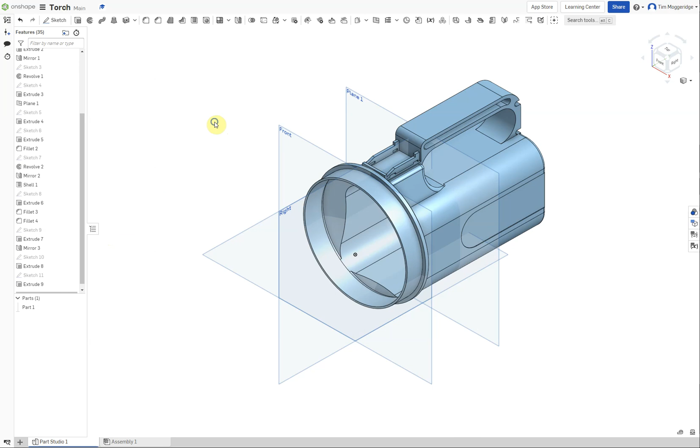In this video we're going to carry on working on our Onshape torch body model, and we're going to add on the features that would allow the switch to be mounted to the torch body. So the first thing we're going to do is, using the right mouse button, just spin our model around once we've loaded it in, and we're just going to right click on this surface and select new sketch, and then we'll press N to view onto the work plane.

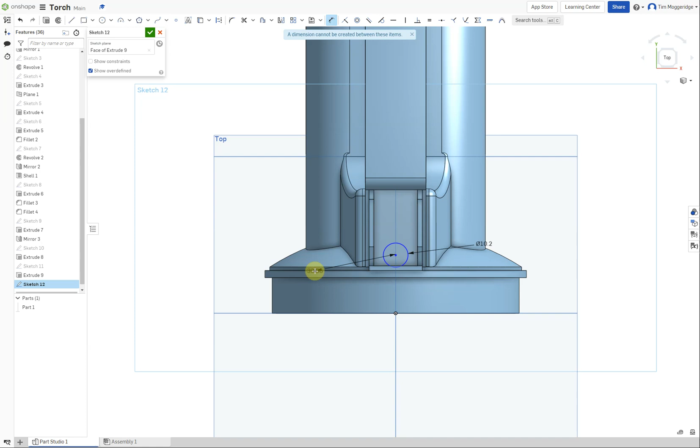I'm now going to use the center circle tool, and I'm just going to draw a circle that lines up with the origin and the edge of the right work plane. Click in the middle to start it, and then click again to create the circle. And I'm simply just going to put 2 dimensions on here. I'm going to dimension the diameter of the circle, which is going to be 10.2 millimeters, and I'm going to dimension from this edge here to the center of the circle, and that is 18 millimeters.

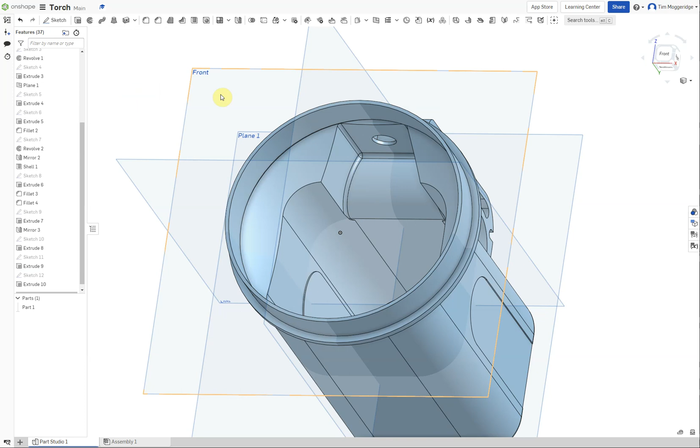And I'm just going to move that round slightly and come inside so that we can see it, and we're simply just going to extrude remove to create a hole. So click on the extrude feature, select remove, and we can just simply change the condition up to next, and it will just put a small hole through those 2 surfaces. And that's the first part done.

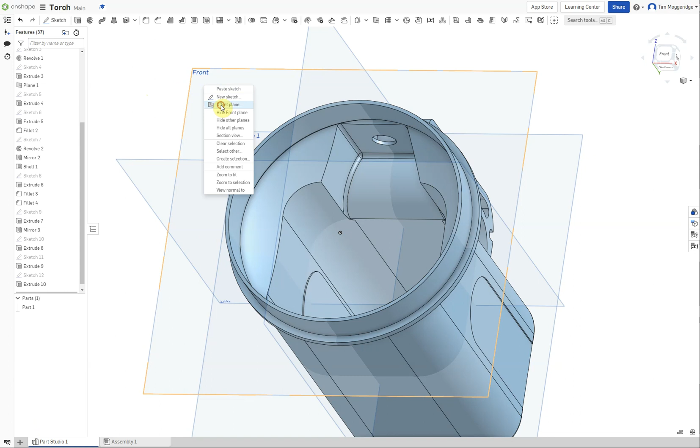We're now going to add in a pair of lugs that would also locate the switch. And to do that, we're actually going to create a new work plane. So at the moment we can see the front work plane. I'm going to right click on the front work plane, and I'm going to left click on offset plane. Now if I spin that around, you can see at the moment we've got a plane 2 coming in front of that. I actually want it to go behind by 36 millimeters.

So I'm going to flip the direction, and you can see that plane 2 has gone behind, and I'm going to change the distance to 36 and click enter. Now you see it's called plane 2, and down here it's called plane 2, but so I know what that is, I'm going to rename it. So click the tick to say I'm happy with it, and then I'm going to right click on plane 2 and rename it, and I'm going to call this switch lug plane, so I know exactly what it's going to do.

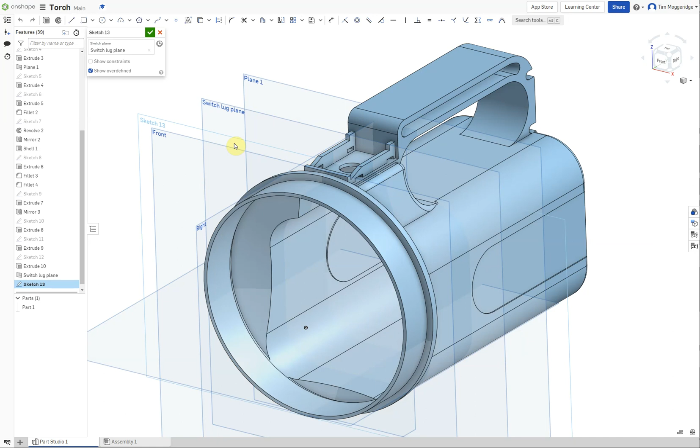So I'm now going to create a new sketch on the switch lug plane. So I'm going to right click on the switch lug plane, select new sketch, and then press N to go normal to that. And we're looking down into the torch now. I'm simply going to select the corner rectangle tool, and anywhere over here, I'm just going to drag out a corner rectangle, and then I'm going to dimension it. So I'm going to dimension the far side to the center line, 13 millimeters.

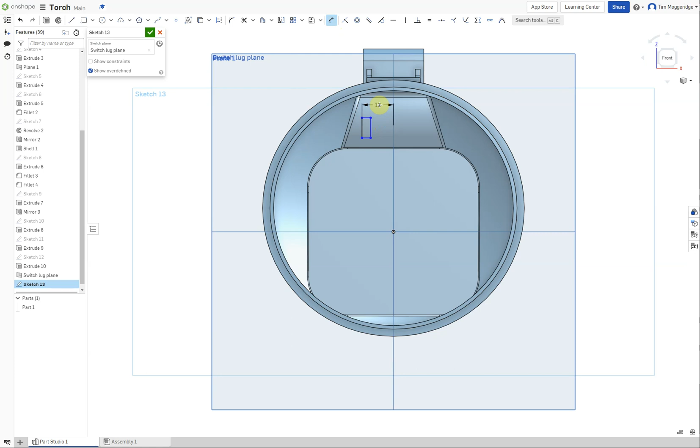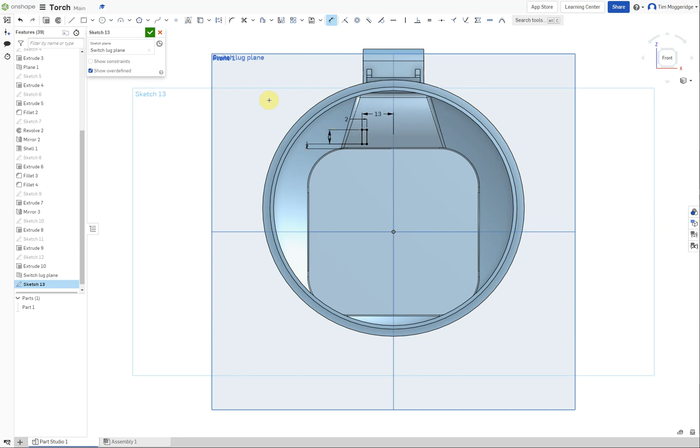I am going to dimension from the very bottom edge here to the bottom line of the rectangle. I'm going to change that to 2 millimeters, and I'm going to make the rectangle 6 millimeters high and 2 millimeters wide. Once I've done that, I'm just going to move that sideways, and I'm now going to extrude that up to the surface in here. So I'm going to use the extrusion tool, and I'm going to change the direction so that it goes into the torch, and where it says blind, I'm going to select up to next, so you can see it's gone in.

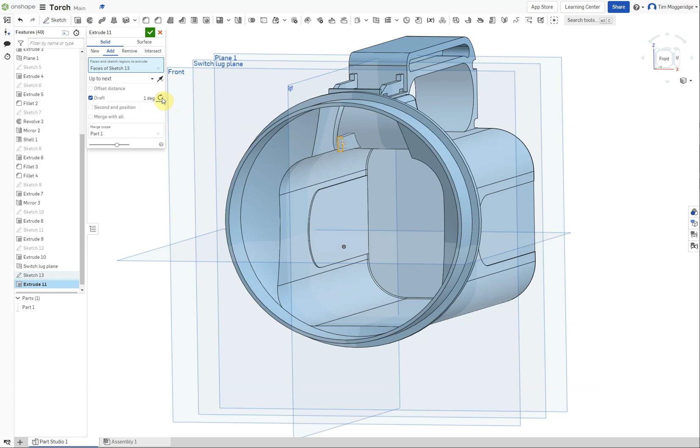But I'm also going to apply a draft angle. So I'm going to click the draft angle, I'm going to change that to 1 degree, and I want it to be drafting outwards so it gets slightly thicker, which you can see it's done automatically. If I click on here to do the opposite direction, you'll see that it narrows. I actually want it to get a little bit wider, so I'm going to take it back to how it was, and click the tick.

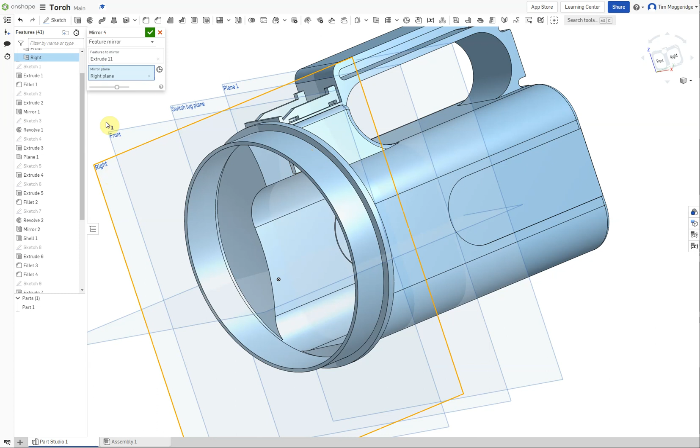Now I want to mirror this feature on the right work plane, so I'm just going to spin it around so that I can see the right work plane clearly. So I'm going to click on the mirror tool, and I'm going to change from part mirror to feature mirror. Here I'm going to select extrude 11, and then I'm going to click in the mirror plane, and I'm going to click on the right plane. And I can hold the right mouse button down and spin it round, so you can see it's drawn another one in there. And now I'm just going to left click because I'm happy with that.

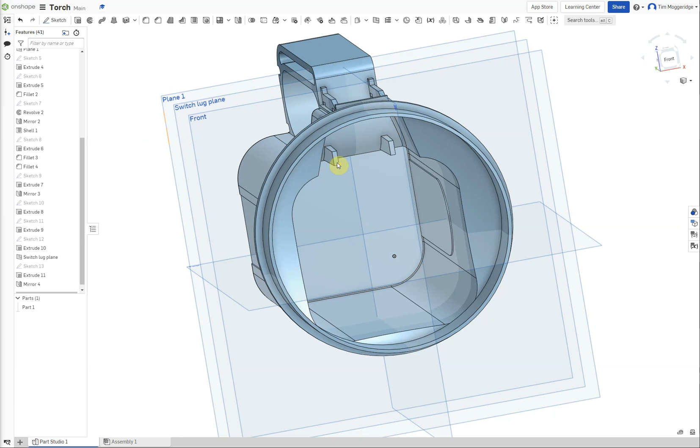The last thing I need to do is to create a small slot across these. So I'm going to select the end of one of them. I can zoom in if I want to, make it a little bit easier. So right click and then go new sketch, press N to view normal to it. And I'm simply going to use a center rectangle this time. So change the rectangle tool to a center rectangle. I'm going to make sure that my center rectangle lines up with this work plane and is above the origin. And I can just position it approximately to start with.

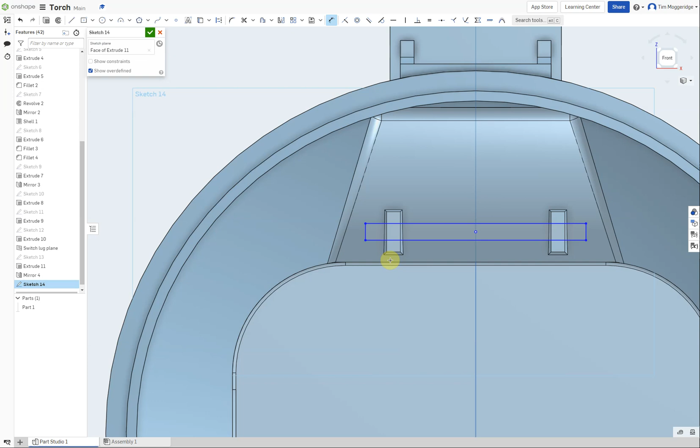And I'm just going to drag it so that it overlaps the edges of these parts, but it doesn't go into the bodywork over here. And now I'm going to add in some dimensions. So again, I'm going to come from this bottom edge of the inside to the center of the rectangle. And I'm going to make that dimension 5mm, which I did coincidentally. I'm going to make the length of the rectangle 30mm, so I know it's not going to be too long and interfere with the rest of the bodywork. And I'm going to make the height of the rectangle 2mm.

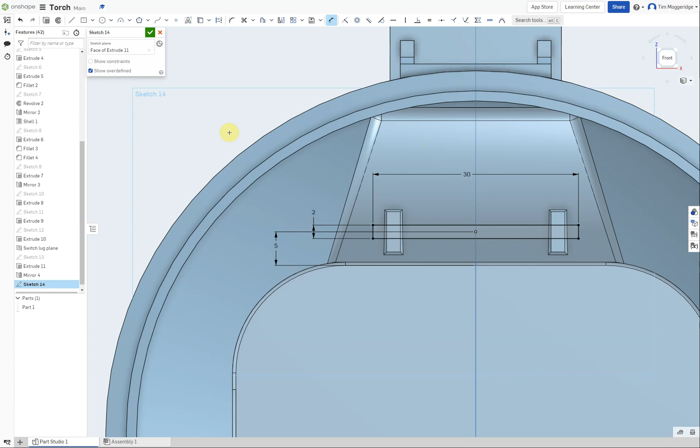And now I'm just going to extrude cut that, or extrude remove 2mm. So feature, extrude, I'm going to remove, I'm going to change that distance to 2. And because I selected remove, it should have automatically changed the direction. You can see it has. Click the tick to say I'm happy, and then I'm going to right click and click on zoom to fit.

And that's it for this video. We've added in the features that will hold on the switch, so the little slots on these lugs and the hole in the top. I'll see you in the next video.